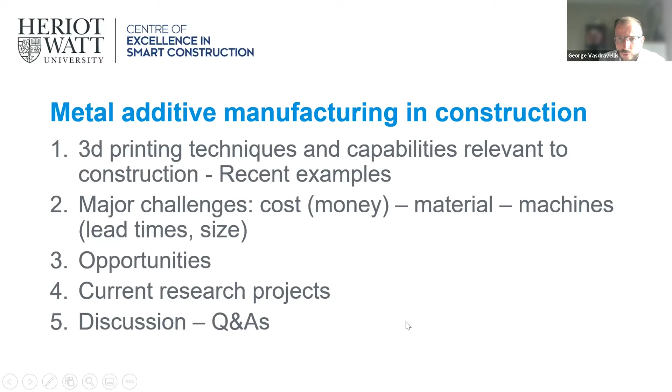So let's start with 3D printing techniques that are relevant to construction. There are two main techniques. One is powder bed fusion, PBF, and the second is directed energy deposition, or DED.

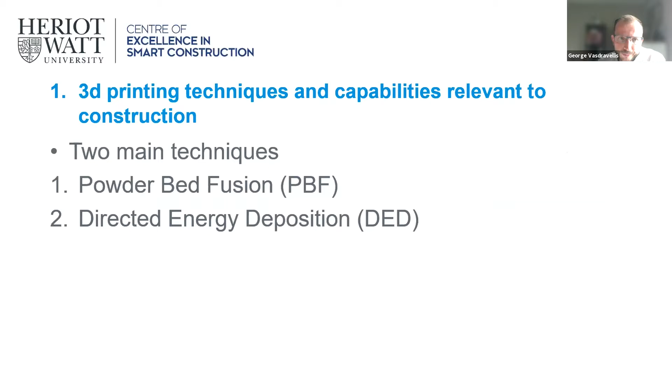Powder bed fusion creates objects in a layer by layer approach. Objects are built up with individual layers that are very thin, in the order of tens of microns thick. This technique offers the advantages of geometric accuracy, surface roughness typically less than 20 micrometers, so a very smooth surface of the component that is 3D printed. Essentially, there is virtually limitless complexity in geometry. We can 3D print metal parts that are as complex as we like. There is no limit in the complexity.

The disadvantage, there are two major disadvantages using this technique. One is that the build times can be very long, taking tens of hours or even days. The melting rate is roughly 50 grams per hour. The other major disadvantage is that the size is limited by the chamber used in the 3D machine, which currently is approximately 250 millimeter by 250 by 250, so a cube. I think there are recently some machines developed that allow up to 500, but again, there is a limit in the size.

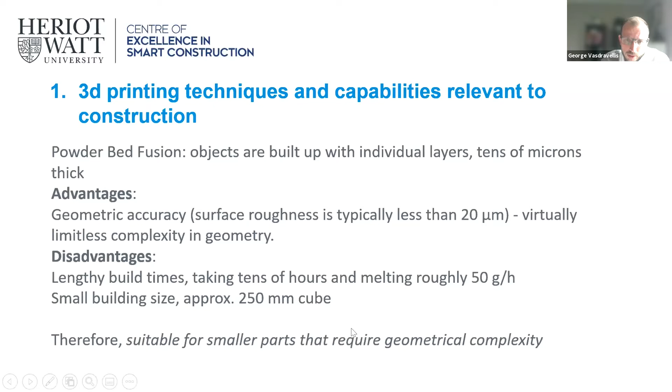Therefore, this technique is suitable for smaller parts that require geometrical complexity. This is an example of PBF in action. So there's a powder bed fused built up 3D built square hollow section, and this is the final product.

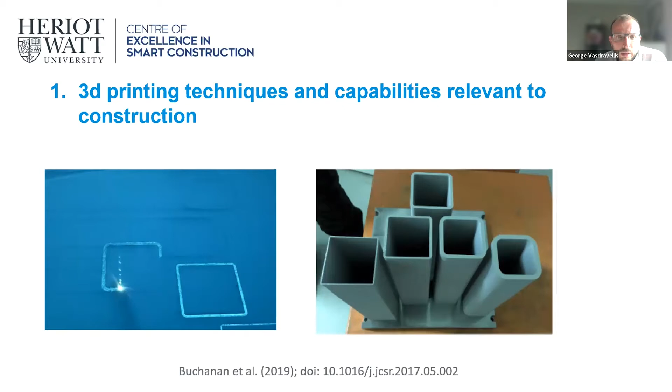A very representative example, one of the first applications of this technique in construction, was done by Arup. This is an image taken from their website. They used this technique, specifically powder bed fusion, to 3D print the nodes of a tensegrity structure that was designed and built in The Hague. This structure involved 1,600 nodes, each requiring a unique design, so optimization and customization from 3D printing was an option. On the left here, we see the conventionally manufactured node.

Using the conventional, traditional manufacturing, we try to use the subtractive technique. I believe the manufacturer of this node would start with a solid cylinder, then extract material to make it a tube, and then weld a number of plates circumferentially to have the slots to connect the cables of the structure. If we use this technique, most probably the same joint would be used for each of the 1,600 nodes.

So the first iteration to optimize this node is here in the middle. That's the first iteration. The final, most optimized node is this one here. This was all 3D printed by the powder bed fusion technique, and this resulted in a 70% weight reduction of the node, and overall a 40% weight reduction of the final structure.

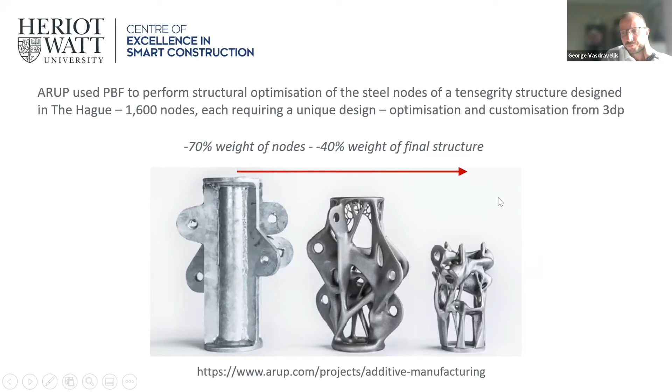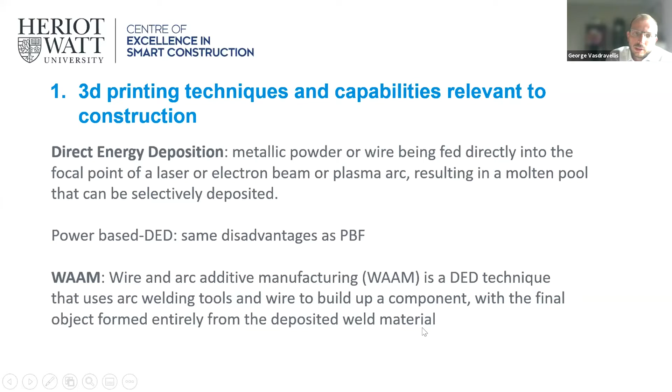So that was powder bed fusion. Then the second technique is direct energy deposition. In this technique, metallic powder or wire is fed directly into the focal point of a laser, electron beam, or plasma arc, resulting in a molten pool that can be selectively deposited. There are two options here: the powder-based DED, which has the same disadvantage as PBF, so it's not worth mentioning. The one that is promising is WAAM, wire and arc additive manufacturing, a DED technique that uses arc welding tools and wire to build up a component, with the final object formed entirely from the deposited weld material. As an example...

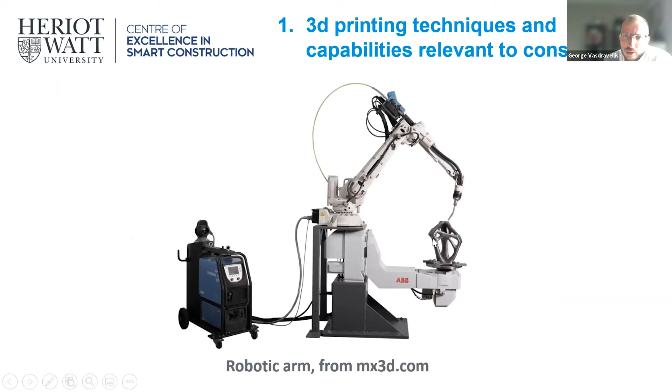We can 3D print virtually unlimited part sizes because it doesn't require a closed environment or chambers - virtually any part size. And it's much cheaper than powder-based techniques; the base material for WAAM is an order of magnitude cheaper than the powder used for PBF.

The disadvantages: first, the final product's surface is quite rough - roughness more than 0.5 millimeters, even 1, 2, or 3 millimeters. So the final part may need treatment, further processing to make it smooth. The most important disadvantage is that due to the heating involved in the technique, we have high residual stresses and distortion in the final part. Therefore all this should be taken into account in the design.

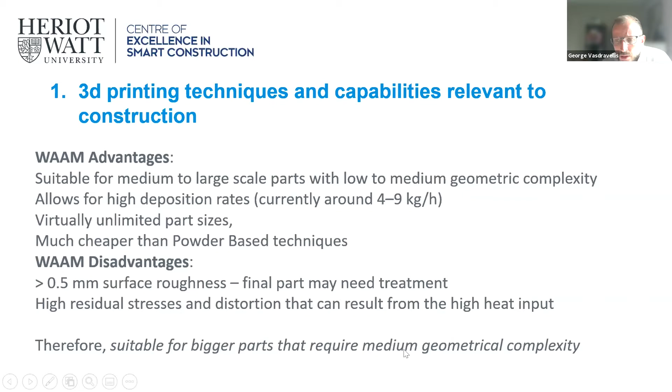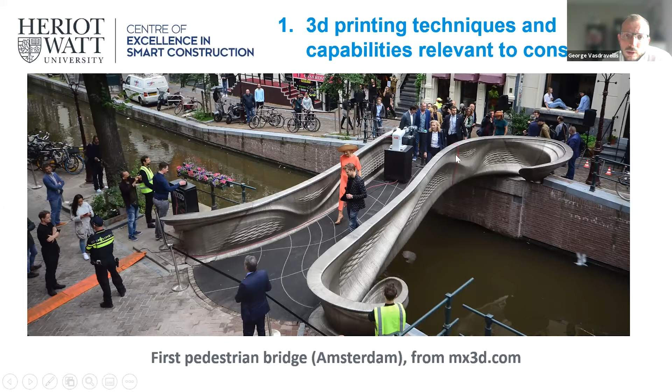This technique is suitable for bigger parts requiring medium geometrical complexity. Here's an example - I think you all came across the news of the first 3D printed bridge from MX3D in Amsterdam, built entirely using the WAAM technique. And that's an optimized node, again from MX3D, for a project in Japan.

Now, major challenges in terms of money are the cost and the long time. The current price of a 3D printed steel part is multiple times higher than a traditionally manufactured one. For example, I took quotations for a potentially 3D printed optimized shear connector for steel-concrete composite bridges and buildings. The price from various companies ranged from 400 pounds to 2,000 pounds per unit, compared to the conventional one at about 80 to 100 pounds per unit. This is a duplex stainless steel optimized shear connector.

We can see great variability in the price - 400, 500, 600, up to 2,000. I don't know the reason, possibly it's the location of the country. Just to emphasize, this is duplex stainless steel - when we 3D print steel it doesn't make too much difference whether we print carbon steel or duplex stainless steel. It makes sense to 3D print duplex stainless steel because it has many well-established advantages.

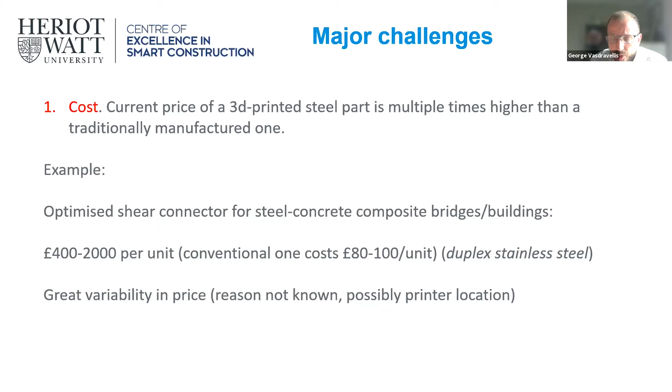The other challenge is printing times, especially for powder-based fusion techniques. These are related to machine capability and the technology. It's expected that advances in technology will improve the lead times. However, currently it sounds unrealistic to 3D print steel beams or columns at reasonable cost.

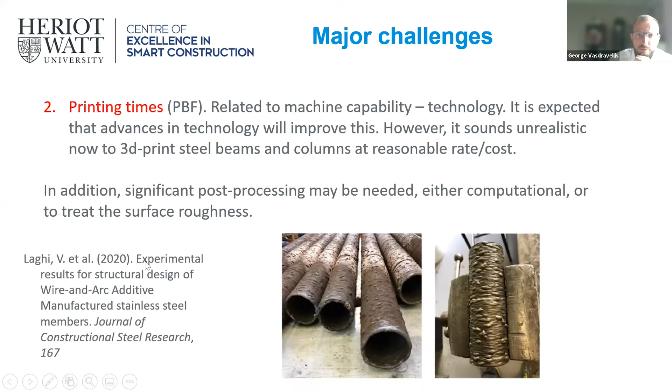In addition, significant post-processing may be needed, which should be added to the final time, either computational or for surface roughness. These are 3D printed circular hollow sections, and you can see the roughness in the surface using the WAAM technique. That's from Laghi et al. in 2020.

Number 3 is the material, so the second M, the material. We don't know too much about the material yet.

So far, there are some stress-strain relationships established for selected steel grades. Of course, much more work needs to be done, because we don't know, for example, the fracture parameters of 3D printed steel, which are relevant to applications like seismic energy dissipating devices where fracture is critical, or other devices.

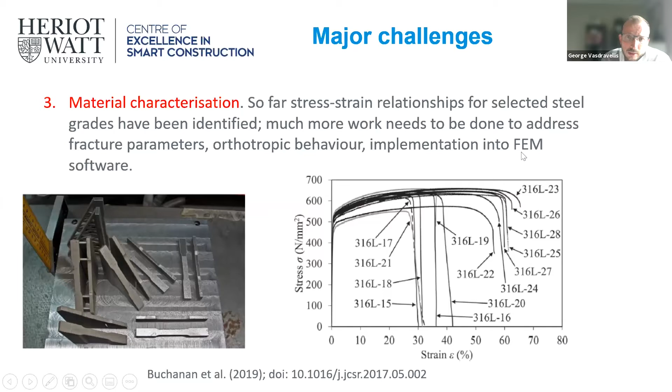We know that there is orthotropic behavior, so the stress-strain response depends on the direction with respect to the direction of printing. Usually researchers take coupons parallel to the direction of printing, at 90 degrees, and at 45 degrees to the direction of printing, and the behavior is somewhat different. So how to implement this orthotropic behavior, and what exactly will be the final constitutive law used, for example, in finite element analysis packages, remains a bit of an open question.

Again, in terms of materials, but we move now to components. In terms of component behavior, we have very limited experimental data. For example, there are two works that I know of so far.

One done in 2019, where they tested 3D printed tubes using the powder bed fusion technique. The failure modes there are, let's say, quite expected. However, in this other work, you can see that the failure modes are a bit unusual, especially the third figure here with this rupture - I would put a question mark on it because it's not very usual in conventional steel. So a lot remains to be done in terms of component-level behavior.

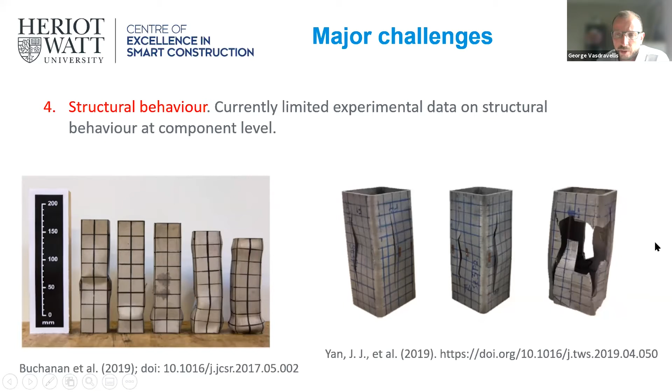Finally, another challenge is the standardization and certification of components to allow mass production, or mass customization if you like, and widespread application. Standards should include specifications for 3D printed steel. A sufficient amount of data and standardized processes are needed. There's a big multi-million European project currently underway that aims exactly to accomplish this, to develop robust methodologies to ensure manufacturability, reliability, and quality of 3D printed metal components.

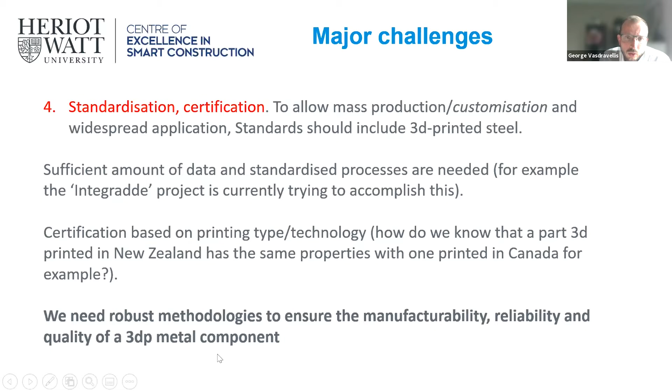Opportunities, current projects, and how I see the vision for the future. I think that currently, as I already said, it's unrealistic to have girders or beams tailor-made and 3D printed, in terms of cost and in terms of time. However, it seems promising in the current situation to have hybrid solutions.

So hybrid construction - for example, to 3D print critical parts such as nodes, or other sacrificial elements for resilience - and then bigger parts like beams and columns will be traditionally manufactured. A current project is the 3D printed steel nodes for sustainable and resilient infrastructure.

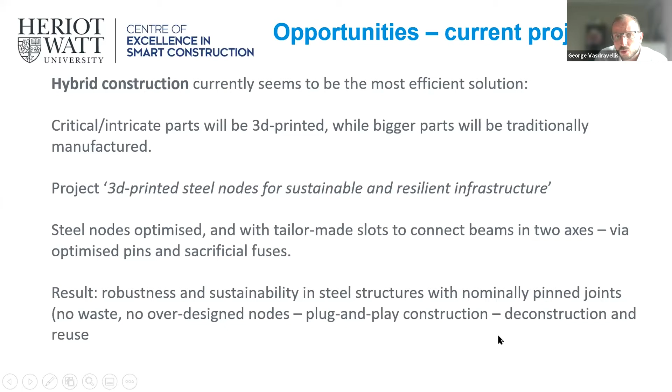We have steel nodes that are optimized, with tailor-made slots to connect the beams in two axes via optimized pins and sacrificial fuses. The desirable objectives will be to have satisfactory performance under gravity load, but also to enhance robustness and sustainability in steel structures with nominally pinned joints. Other benefits include eliminating waste - we don't have over-designed nodes, everything is tailor-made, unique designs for every node - plug-and-play construction, and deconstruction and reuse, in line with the modern circular economy model.

Conceptually, it looks like this: we have the optimized node. This is just conceptual, but we remove the material from where we don't need it, leaving only the necessary material. At the same time, we can create slots to connect the beams, and we can also use optimized fuses.

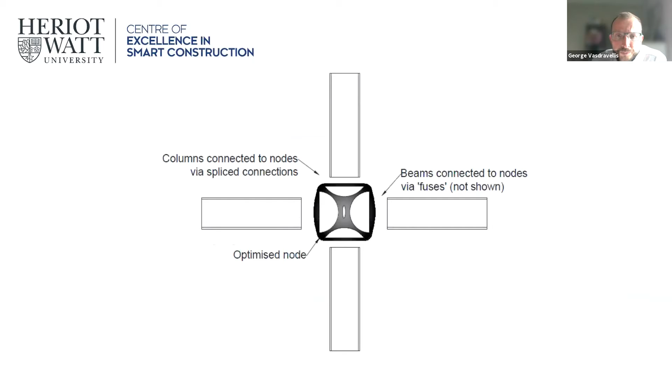Currently, there's a very recent project that was presented at the Eurosteel conference this month, by researchers in Germany. What they propose is - why use end plates where, for example, the central part isn't used much? We don't need the central part, so let's take this tab and try to optimize it, and also create some 3D printed details to connect the bolts through the flanges of the column. They propose this as a first step to save material.

So the idea is the column, or in this case the beam, will have these protruding 3D printed slots - details already printed using the robotic arm and WAAM in the shop - and then you assemble this in the factory.

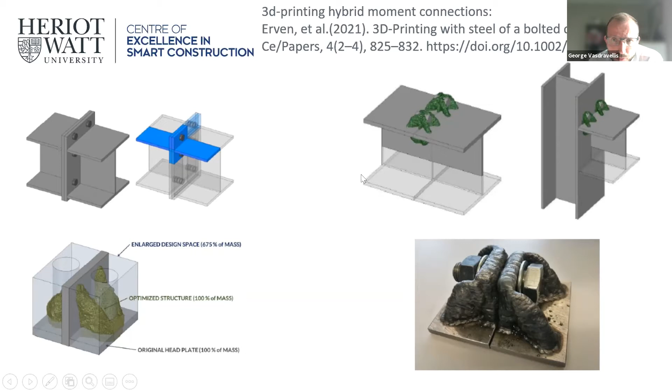Okay, that's all. I think I took 4 more minutes. Thank you, and yeah, let's have an interesting discussion.

Thank you, George, that was really informative. I would like to now just open it up to panel discussion. If all the panelists want to unmute, maybe we can start with you, Paul, and work around the rest.

Well, thanks, Kyle. Firstly, thanks to George for a fascinating presentation. We see a lot of focus on the cementitious applications of additive manufacturing in construction, so I think it's really good to see something about metals for once. Thank you very much, George. I'm sure we're going to see some great questions coming through.

I just wanted to mention a few high-level thoughts on the potential adoption of 3D printing in the industry. I think we can all see from your presentation and the things we see on the internet that there's advances in technology and proof of concepts that we're seeing. The question the industry needs to ask itself is, what's the problem we're trying to fix? Where's the value in the adoption of the technology, and how can its value be realized?